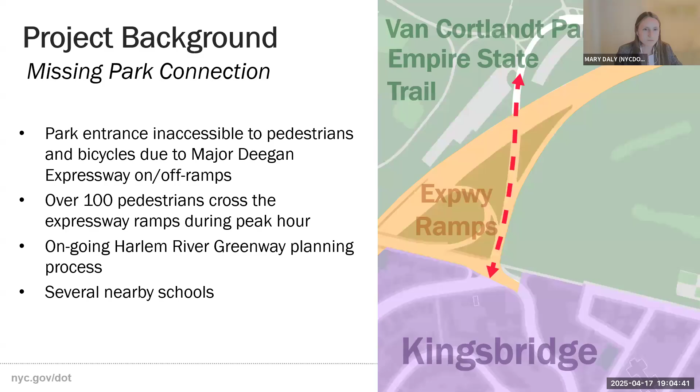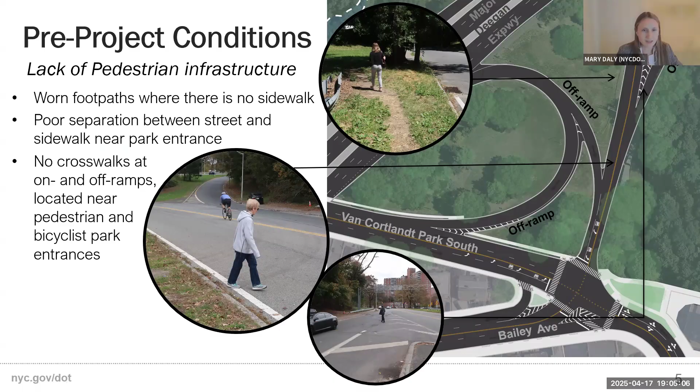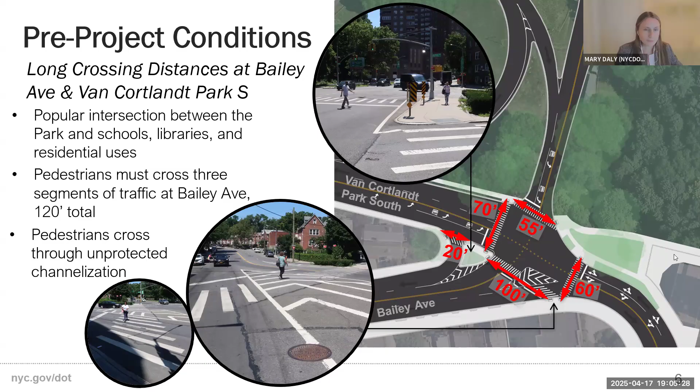There's frequent pedestrians walking across these unprotected intersections to access the park and bike path just north of here. Additionally, just south, there are long crossing distances in the existing crosswalks at the intersections, making it a very difficult intersection overall to navigate as a pedestrian. Furthermore, the bike trails inside the park attract many bicyclists, and with vehicles also heading to and from the expressway, it makes for a pretty dangerous condition for vehicles and bicyclists as they navigate to their respective destinations.

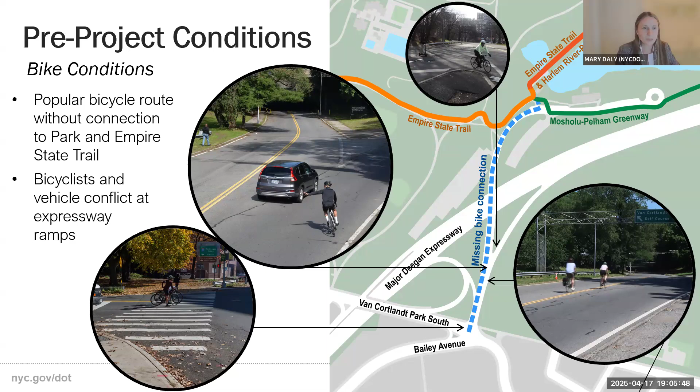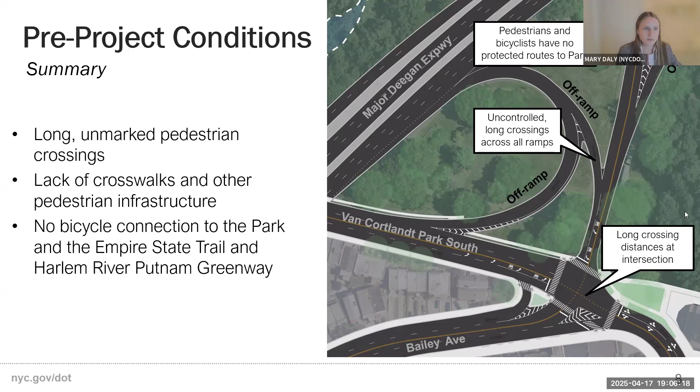So in summary, this intersection and expressway ramps lack basic pedestrian infrastructure such as sidewalks and crosswalks. Bicyclists also lack proper delineation from vehicles as they head to and from the bike paths in the park. But despite these conditions, pedestrians and bicyclists still continue to use this park entrance, so we are obligated to accommodate these users in a safer way.

Since we previously presented, we also wanted to show some additional research our unit has done about the surrounding area, including our comprehensive planning analysis, where we've looked to ensure our project fits into both other projects currently being planned in your neighborhood, as well as being in line with our larger goals as an agency in the Northwest Bronx. Our agency goal is to accommodate the safe, efficient, and environmentally responsible movement of New Yorkers, which this project aligns with.

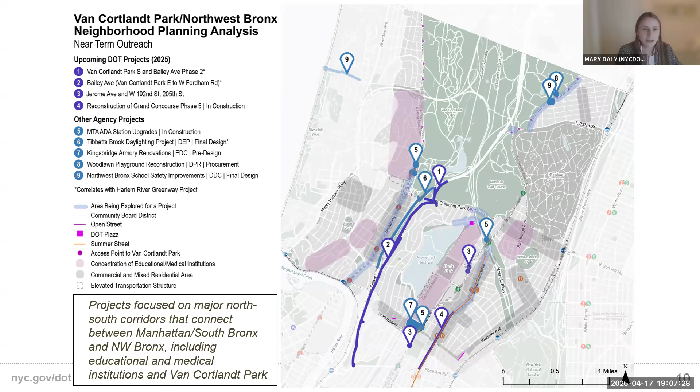We are working especially closely with the other projects related to the Harlem River Greenway. You probably know about the Tibbetts Brook daylighting, number 6 on the map. We are working with their team to ensure our project will be completed before they begin construction next year, as well as the Bailey Avenue Safety Project, number 2 on the map, and we've worked closely with their team to ensure our project connects to theirs. You'll be hearing from them following this presentation, as Anthony said at the beginning.

Also, as part of the Harlem River Greenway efforts I mentioned, we've extracted some of the comments related to this particular intersection, and it's worth noting that many participants mentioned improving this park connection to the neighborhood.

As an update from last year, we completed a small portion of our project to lessen the construction impact in one year and speed up completion. This included parts of the sidewalk leading in and out of the park, shown in pink, as well as a pedestrian refuge island in pink on Bailey Avenue to help with that long crossing distance for pedestrians here.

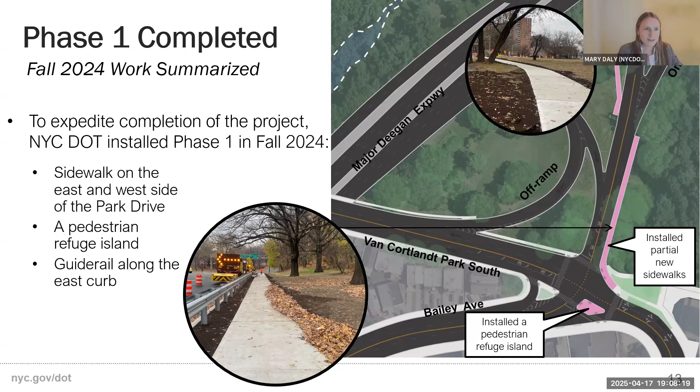We hope to continue these updates this year, and we're happy to report that our conversations with State DOT have been successful, and they approved and agree with our design to realign the expressway ramps as we presented previously. These designs haven't changed at all, but as a reminder, I will go through our reasoning for the proposal on screen here.

The two off-ramps will be realigned to allow us to implement stop controls for pedestrians and allow them to safely cross. At the north ramp in particular, because of this new T-intersection-like geometry, it will allow us to legalize this left turn for vehicles going north on the Major Deegan Expressway, turning left into the park. We've seen tire tracks on the grass where many vehicles are currently making this illegal movement.

In order to lessen the impact from these unexpected movements, we want to allow this safely, and also improve the overall health of the vegetation in the area. On that note, we'll be filling the old ramp areas with compost and grass seed in coordination with Parks and the Van Cortlandt Park Alliance. They're a supporter and partner with us on this project, as it fulfills part of the goals in the Van Cortlandt Park Master Plan.

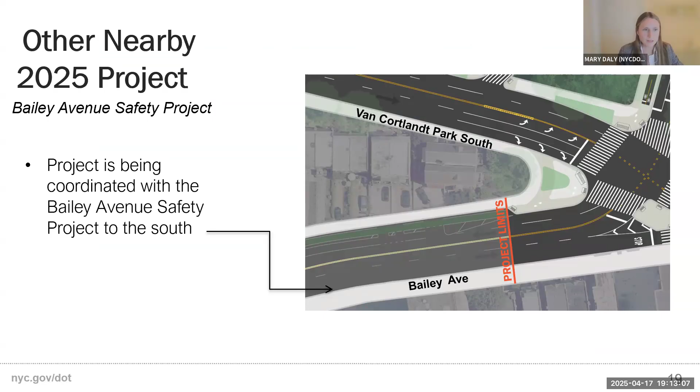And then we just wanted to give you a preview of what's happening next and confirm that we are working very closely with the Bailey Avenue Safety Project to ensure our projects align, so the traffic model and all the plans are fully coordinated and working together to make sure everything's feasible and realistic.

And finally, I'll end on our projected timeline for the project. We hope to begin construction this spring and be substantially complete by late summer, early fall. So, thanks, and I'll take any questions or comments.

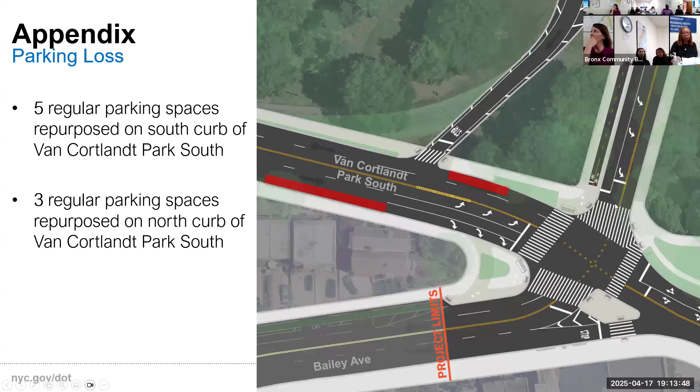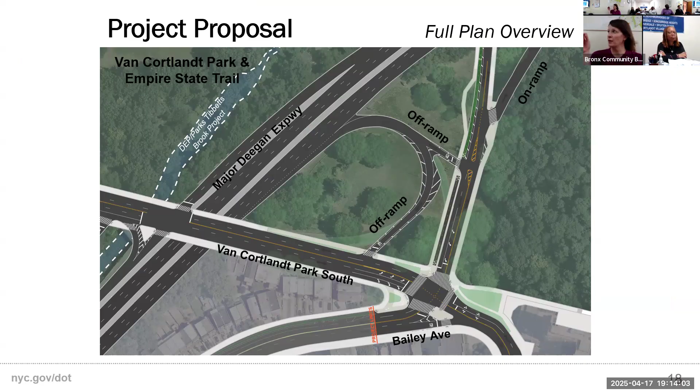I'll just interject and say that here, we won't be allowing the left turn. I was referring to this ramp where people will only be making the left turn if you're going into Van Cortlandt Park South. But for this one, we won't be allowing the left turn. It'll still be right turn only, and we will be implementing rubber speed bumps as well as signage to ensure vehicles aren't allowed to turn left at this off ramp.

Does that make sense? Beyond signage, is there anything else? Because I think in the previous iteration it was quite obvious because of the angle, almost 90 degrees. Unless the signage is very obvious, there's the possibility of somebody saying, I didn't realize, because the break point to recognize is much higher up, and the decision to make a left turn is essentially made as you're coming off the Major Deegan. If anyone makes a mistake, no one's going to loop around, they're going to invariably try to make that risky turn.

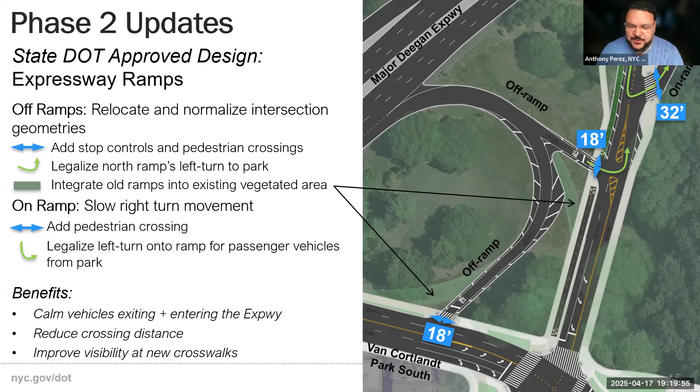That works, screenshots work. My second question, and my bigger concern with this area, is the removal of a slip lane here, because of the amount of traffic that goes into that area, which backs up all the way back to Broadway, between 3 p.m. and 6 p.m., and in the morning as well. With the large development coming, the school and the new development of about 370 apartments, it's just gonna get worse when you remove the slip lane.

Even with what appears to be about 200 feet of a lane - I can't really tell what's there because I don't see any markings. It's 300 feet, and that's at a stoplight as well, right? So the traffic's gonna be backed up?

Well, that was my question and point as well. And is there still street parking there? Last time you conceded that we weren't gonna touch that opening, which we were very happy about. You took our comments into consideration, but now you've changed it again to add it back in, removing that turn that alleviates a lot of the backup that's always occurring over there.

I also wanted to ask, because I see you put green on some of these islands - I'm hoping that means you're still gonna have some greenery on these areas, because I know for the bus stop it's just cement block. And I know as a committee they've always been asking to add more green or more pervious materials to these areas. Will that be taken into consideration as well?

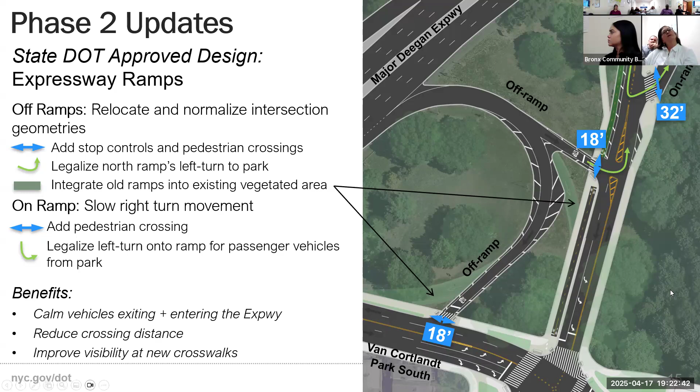Can I just ask one more time, why did we change that right turn slip again? Why did you get rid of it and do it this way?

One of the reasons is there's backup when heading eastbound. Part of the reason is you have parked cars against the curb, and then you have through traffic that's backed up and blocking the right turn. That's why the right turn traffic is backed up. So this way we can have a much longer lane, so the through traffic that's preventing the right turn traffic from getting to where they want to go now has its own dedicated lane.

We're also trying to coordinate with what's coming next, where we have a proposed bike lane on Bailey Avenue, to have bikes navigate through this space and have the bus stop that exists today work with all of that. The best design solution is what you see here, where you have a closed slip lane, so the bicyclists and bus stop users can all have a space together in a coordinated effort, so everybody can navigate the space without running into each other. By closing the slip lane and providing extra space for the right turns, it should all work together.

Our data does include the aforementioned development. We took their traffic analysis and applied it to our traffic analysis, and we found that this still works within our modeling.

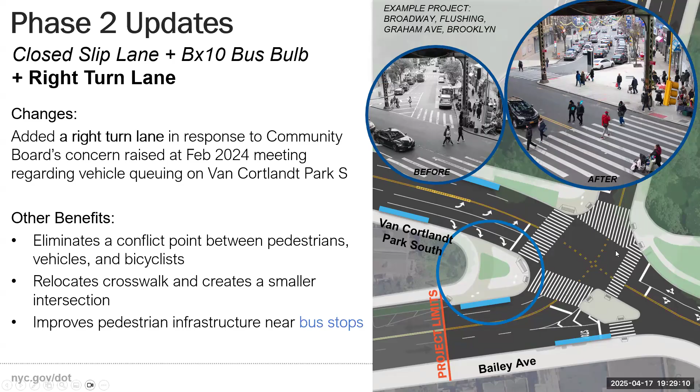All right, my other question is about the entrance 200 yards north, to get onto the Deegan from this access point. I've always seen that as, and I'm guilty of it myself, an acceleration lane to get onto the high-speed Deegan Expressway.

And I like the fact that you have a bulb there, but I think a lot of people will be accelerating through that crosswalk. I'm wondering if maybe you want to make a raised crosswalk there to slow vehicles so that they start their speed on the actual on-ramp.

That's a great suggestion, we'll look into it. Okay. I can't make any promises, we haven't done the analysis yet. No, I understand. But I'm not sure if we're permitted to do that as an entrance to an on-ramp, but if we are, I think it's a good idea.

Okay, thank you. Okay, thank you, David. Let's go to Michelle Cordona.

Hi, just one quick note about that same exposed slip lane that David was talking about. I walk that on a daily basis, and I feel unsafe as it is currently built. More often than not, I have to stop with my dogs because cars never yield, even though there is a little bit of a sign for them to slow down.

So I think the proposal definitely will make things safer for pedestrians crossing to go to the park. As for cars turning, that radius I'm seeing right now—I'm also an architect—looks more than enough, and it does slow them down a bit, but they can still easily turn.

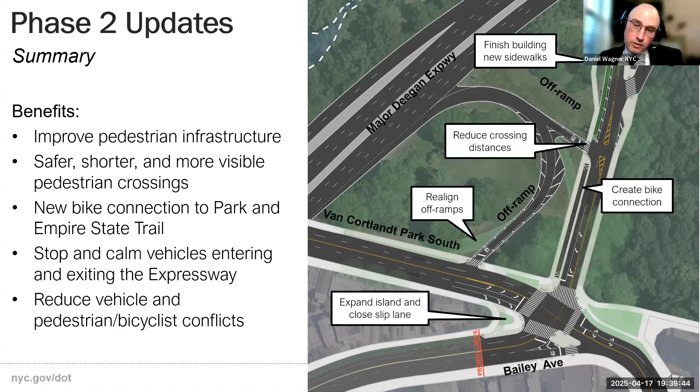I will just say that yes, that's all stuff we can absolutely look into, and adding the appropriate signage. The whole point of this project, well, one of many points of this project, is to create a connection. And as you're pointing out, there's a lot of things to the north here that we're connecting to. So we would be remiss if we did not include the actual information about said connection that we went to lengths to build. So we will look into that. The good news is that once we're done with construction, we can continue to work on that, as signage is a much lighter lift. Sure, thanks.

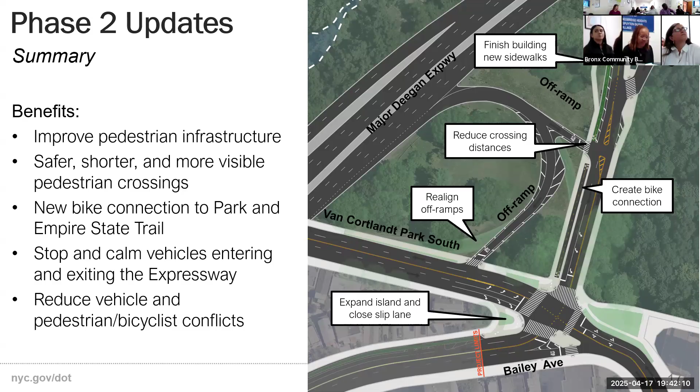Thank you, thanks to Dan and Mary. As I mentioned, this is a 2-game day here. So we have another DOT unit that's here going to kind of seamlessly continue this project past that project line that you just saw on the last slide.

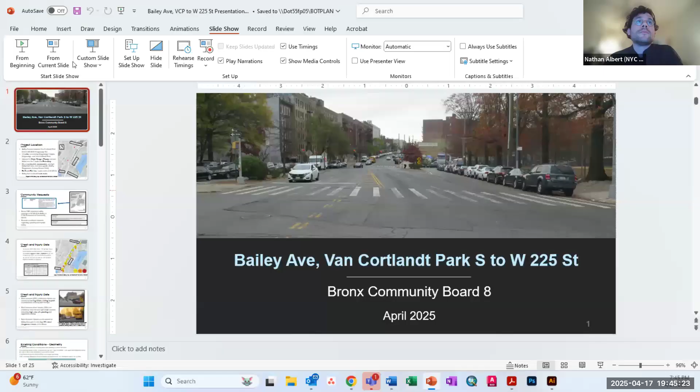Can everyone see this? Yes. Okay, thanks Chris for the introduction. My name is Nathan Albert. I am a project manager on Chris's team at Research Implementation and Safety.

Like Chris said, we're looking at Bailey Avenue. The scope would be from Van Cortlandt Park South, where we've just discussed, south to West 225th Street. So this is 1.1 miles that connects the neighborhoods of Kingsbridge Heights, Kingsbridge, and the park to the north.

It's directly adjacent to the Major Deegan Expressway. In some cases, it's directly on top of it. In some cases, there are buildings or parks in between them in a thin strip. It's also 1 block away from Broadway. Some places it's a quick walk, some places it's a little longer to get over the highway. But Broadway, as we know, has the 1 train and much heavier commercial activity just 1 block away.

Along Bailey Avenue, it's a mix depending on where you are. In some places it's residential with tall apartment buildings or row houses. There are a few patches of commercial activity, particularly around West 238th Street, and some light industrial uses like auto body shops. There are also some parks, particularly between West 233rd and 234th Street — you can see Bailey Playground and Cooney Grauer Field.

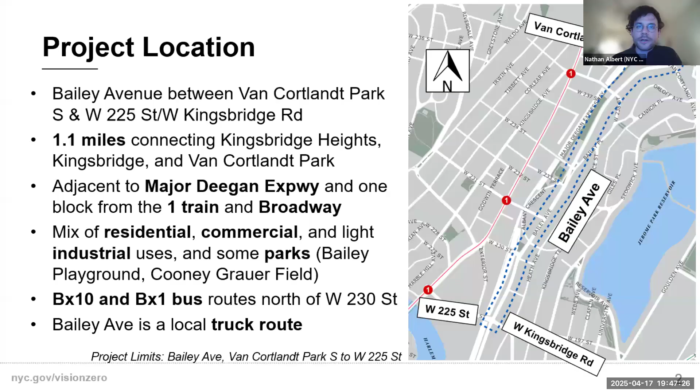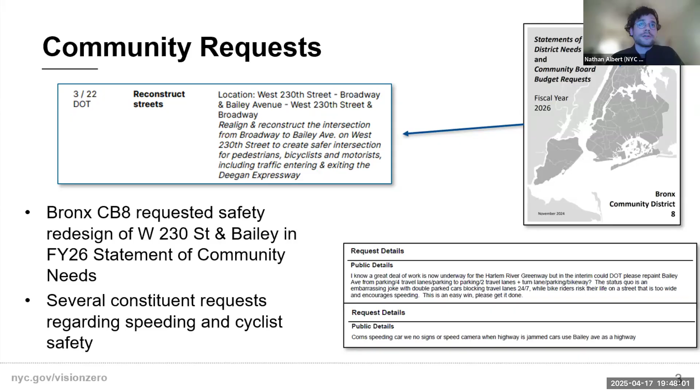In the past 5 years, there have been 179 people injured on this portion of Bailey, but there have been 18 severe injuries and 2 fatalities — one at West 229th Street in 2021 and one at West 225th Street in 2022. Actually, when we first started looking at this project and went before 2020, there were a number of other fatalities, but they've timed out of this 5-year window.

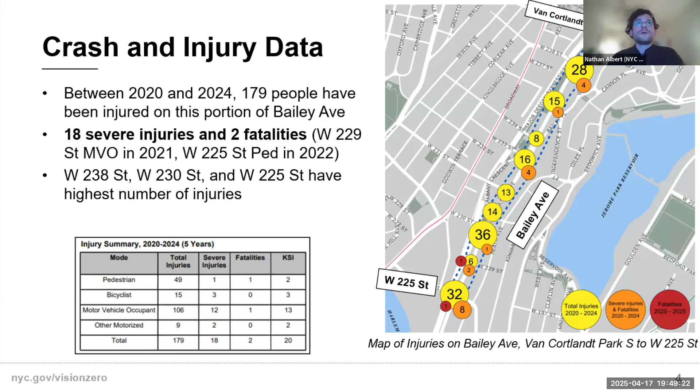And the locations where there are the highest number of injuries are kind of the ones you'd expect — they're the busy intersections: West 225th Street, West 230th Street, West 238th Street. That's where we see some of the worst numbers on the corridor. Diving a little deeper into the data — sorry, there's a firehouse right next to me, so just pause so you don't hear that.

Diving a little deeper into the data, the most common pedestrian injuries were caused by drivers failing to yield to pedestrians. These pedestrians were crossing with the light, in a legally marked crosswalk, doing the right thing, and they were hit by a vehicle that failed to yield. These are types of crashes we see when drivers take turns at high speeds without paying attention, particularly with wide areas and no real visual narrowing of these intersections.

The most common driver injuries, over a third, were caused by rear end and right angle crashes, which indicate high rates of speeding and aggressive driving. And like Chris said, this rate of severe injuries puts it at the top 10% of the most dangerous streets in the Bronx.

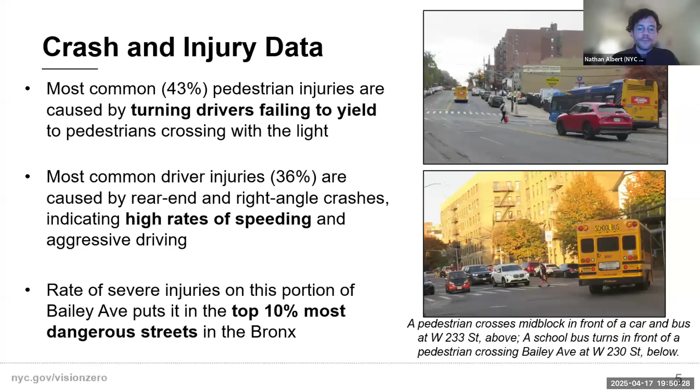Going into the existing geometry of Bailey Avenue, every intersection is different, and we'll go intersection by intersection a little bit later in this presentation. But in general, we see a 60-foot cross section with 2 moving lanes in either direction and parking along the curb.

There are several very long blocks of Bailey Avenue here. We call this an edge condition. Just along the west curb, we have parks, we have the highway, and not as many intersections breaking up Bailey Avenue. So we see long blocks that encourage speeding and a lot of reckless driving along this corridor, both observed in our field visits and in complaints we've received from constituents.

These 60-foot cross sections, which sometimes get wider in some cases, create very long crossing distances for pedestrians. And moreover, there's just no dedicated space for cyclists along this corridor whatsoever.

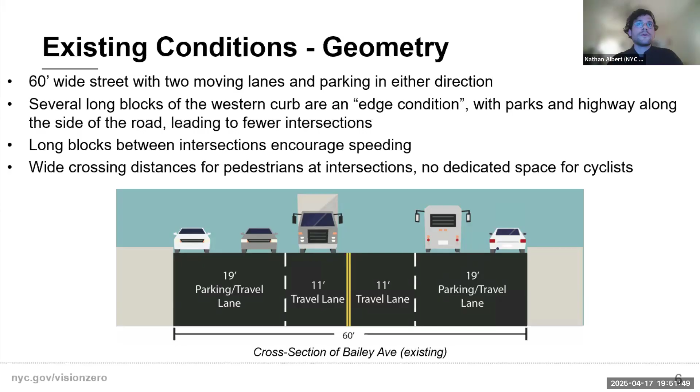Getting a little bit deeper into the existing conditions by mode. For drivers, there's excess capacity. These 2 travel lanes result in speeding, double parking, swerving, and unpredictable behavior. The speeding, particularly on these long blocks, leads to high rates of rear end and right angle crashes and injuries, particularly in the mid blocks. The data we get from the NYPD will sometimes classify crashes in the mid blocks - they're not happening at the intersection, they're just happening on straightaways. We see a high number of these speeding-related crashes just in the mid blocks because of speeding and reckless driving.

Moreover, at every intersection, there are no turn bays. There's 2 lanes of traffic, but they're not really marked. So if you're a vehicle looking to go straight, but you're in the left lane, and someone in front of you is trying to make a left turn and waiting for an opening, that vehicle waiting for the left turn gets pressure to make the turn faster, maybe do something reckless or sudden, creating more opportunities for conflict and crashes. And if you're in the vehicle that wants to continue through the intersection, you might swerve around that vehicle, which creates further opportunities for crashes. So there's no turn bays at any of these intersections, and we see that creates real problems for both left turning vehicles and through moving vehicles.

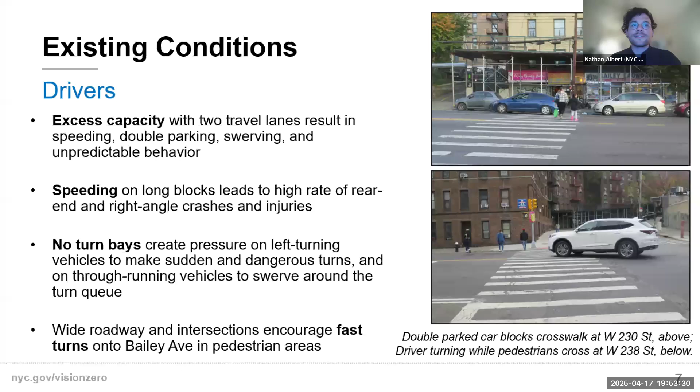Wide roadways and intersections encourage fast turns onto Bailey Avenue, particularly in pedestrian areas.

For pedestrians, there are long crossing distances everywhere, particularly in the areas one block away from the 1 train on Broadway - that's West 238th Street, West 231st Street, and West 225th Street. We see very high numbers of pedestrians going to and from the train, and then they come to Bailey and cross 60-foot, sometimes longer distances without any protection from vehicles that are driving quite fast.

In a number of these locations, the intersections are misaligned as well - they're not really happening at right angles. So cars are making turns that are sort of highway-like, shallow turns instead of being able to make the full slow 90-degree turn that has better safety benefits. And as I said earlier, vehicles fail to yield to pedestrians all across this corridor and cause almost half of the injuries to pedestrians on the corridor.

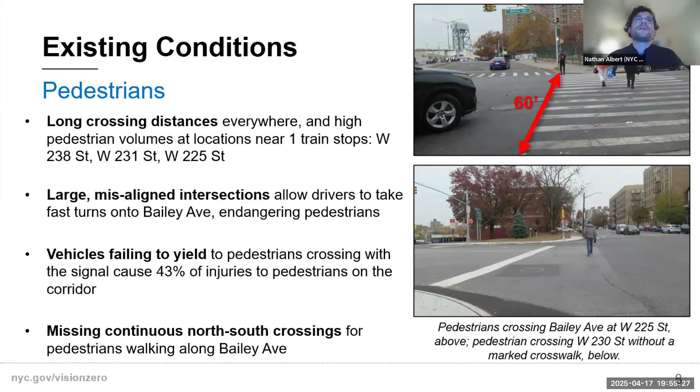Finally, for cyclists, despite there being no dedicated space for bicycles on Bailey Avenue, we see almost 150 cyclists use this stretch per day. We can infer that they're taking this to Van Cortlandt Park, but also to Broadway Bridge to get into Manhattan, and other destinations in the neighborhood, the commercial areas one block to the west along Broadway. But the lack of dedicated space along Bailey Avenue leads to cyclists sharing travel lanes with fast-moving buses, trucks, and personal vehicles. And because of the double parking all along the corridor, we see cyclists swerving into the left lane of traffic sometimes to get around them. This is just an unacceptable and unsafe situation.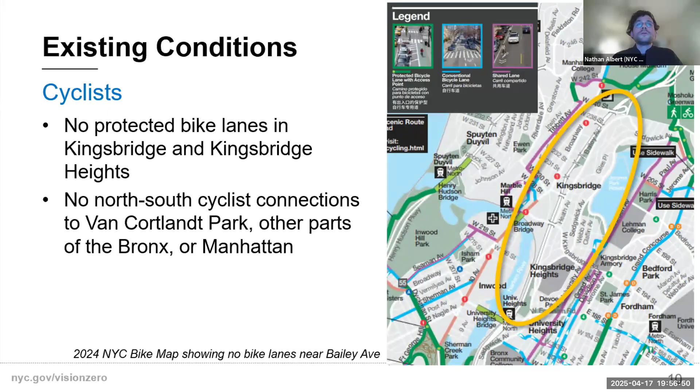So here's our proposal. On the top right, you can see the existing cross-section at 60 feet. We're proposing removing a travel lane in either direction, which will narrow the area of the street through which vehicles can drive, and calm traffic. In that space, we're going to be creating a wide painted flush median that's generally about 9 feet wide in the center of the street. And on the west curb, we're going to be adding a parking protected two-way bike path along the west curb of Bailey Avenue.

I want to note that in the approach to every intersection, we're going to be including a turn bay. So this will maintain the current capacity of two lanes approaching every intersection, but it'll organize the traffic into a left turn and a straight turn bay, or a straight and a right turn bay. And that's demonstrated on the bottom right of this slide.

We're also, at all feasible locations along the corridor, going to be implementing pedestrian islands to shorten crossing distances. And these islands also will encourage slower and safer turns for vehicles to reduce those types of failure to yield conditions that we have been discussing all throughout this presentation.

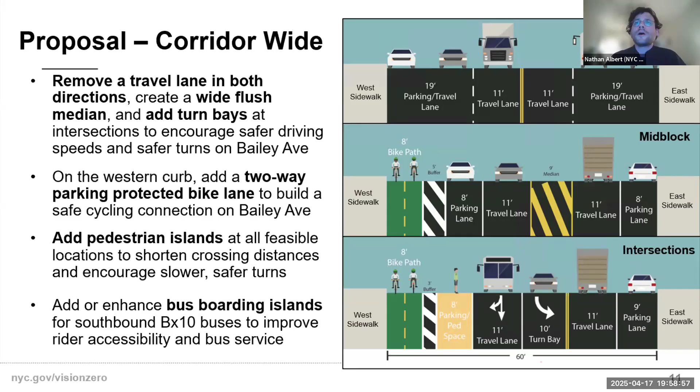So one more note about this design. Chris earlier mentioned this idea of KSI, killed and severely injured. This is something that at DOT, when we're looking at data and where to allocate our resources, we're really looking at this KSI number. And the design that I shared is something that DOT has been doing for 10, 15 years now, so we have a really good base of data that we can look at to see the types of safety benefits these types of projects are associated with.

What we see is these protected bike lanes improve safety outcomes for all road users, drivers, pedestrians, and cyclists alike. But the most significant safety improvements are associated with senior pedestrians. We've seen 39% reductions in KSI crashes, killed and severely injured crashes, for senior pedestrians when we implement these types of protected bike lanes. So I just wanted to call out the real broad safety benefits of this project as we continue through the presentation.

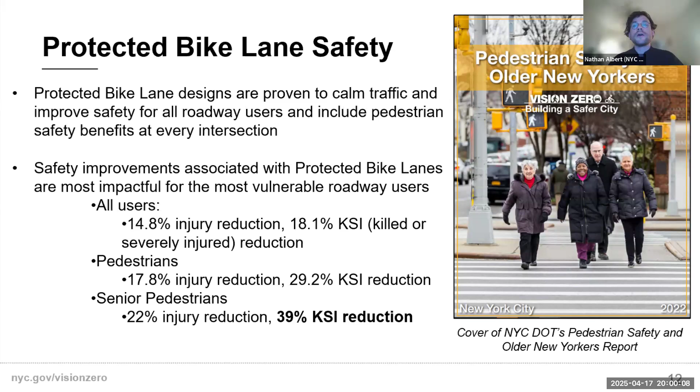I'm going to go through each intersection starting from the north and finishing at West 225th Street, and then close out the presentation, and then we can take questions. I'll just mention this presentation will eventually be posted on our website.

We have talked about this one location at length because of Mary and Dan's prior presentation, so I'm not going to get into too much detail here. None of this is new, but this is meant to focus on what's happening south of Van Cortlandt Park South. One thing I just want to note that actually isn't called out in any of these boxes here, but it's something I was thinking about as we were discussing the proposal, is traffic flow at this location.

It's a concern that was raised by the community last year, and it's a concern that we've been considering as we iron out this design. Just want to note that because of the geometry at this intersection, we're maintaining on Bailey Avenue, south of the intersection, 2 lanes in either direction. So this is designed to keep traffic flowing.

For the right turning vehicles coming north on Bailey Avenue to turn right onto what eventually is called Van Cortlandt Avenue West, because east of this intersection is called Van Cortlandt Avenue West, we're going to be converting that right turn to a stop sign from the current signal, so it'll help process the vehicles out of this intersection a bit more efficiently.

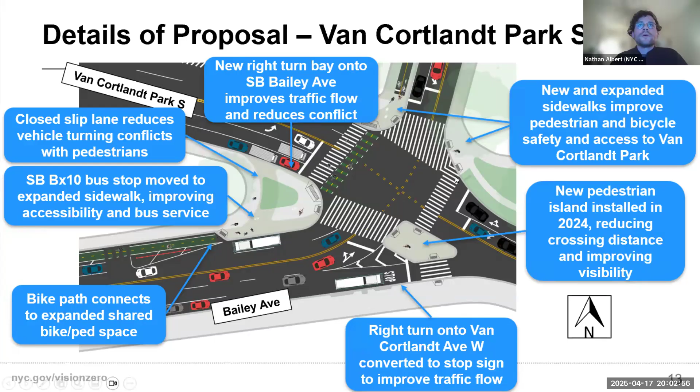So this is West 238th Street, and the big intervention that we're proposing here is the bus boarding island on the northwest corner. That will improve the Bx10 southbound accessibility and bus service, and it'll also remove conflict between buses and bus riders and the cyclists that are using the west curb bike lane.

This island will also have a calming impact for vehicles that are making the right turn onto westbound 238th Street. It'll also reduce the crossing distance for pedestrians that are crossing in this north leg of the intersection of Bailey, that they're crossing Bailey Avenue, and generally just reducing the exposure that pedestrians have to vehicles.

I also want to call out the turn bays at this intersection. Southbound, there will be a new left turn bay that organizes the left turns to 238th Street, gets them out of the way of through traffic, and allows them to make a more patient and safe turn.

And then for northbound Bailey Avenue, we're proposing both a left turn bay and a new protected left turn signal that allows the left turning vehicles to make this turn onto West 238th Street without any conflict with any oncoming vehicles, pedestrians, or cyclists. This will have a great impact on safety for all users, but it'll also make for a much more predictable and organized experience for drivers at this intersection. And as I said earlier, this is one of the busiest intersections, both in terms of crashes and pedestrian numbers, on the entire corridor.

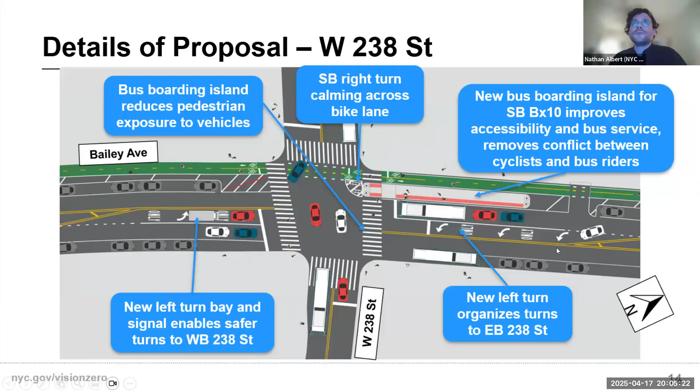I mentioned earlier that there are these sort of gaps in what would be a consistent crossing area for pedestrians that want to walk north or south along Bailey Avenue. There are two concrete islands at the intersection of West 234th Street, Bailey Avenue, and Bailey Place. There's currently no legal movement for vehicles to move through the slip lane at all, because if a vehicle wants to move north on Bailey Place, they're going to make the right turn one block south on West 233rd Street to merge onto Bailey Place, or to exit Bailey Avenue in a sense. They're not going to be doing it — it's currently not legal at 234th Street anyway.

So we're going to be closing this slip lane in concrete so that pedestrians can continue north or south on Bailey Avenue without having to deal with any conflict or even any traffic signals. It's just going to be a new sidewalk.

On the west side of the intersection, we're proposing 2 new pedestrian islands: a smaller one on the northwest corner and a much larger one on the southwest corner. These islands will calm turns, reduce conflicts with vehicles for pedestrians, and also protect the cyclists that are using the new 2-way bike path on the west curb.

This southwestern concrete island, which is larger, is also designed to slow the turns for southbound vehicles heading onto this slip lane across from the park, continuing south onto Albany Crescent. Currently it's just a wide open space with a lot of double parking, and when there's no double parking, a lot of speeding. This larger island will force cars to make a much slower and deliberate turn here, yielding to cyclists and pedestrians moving across it.

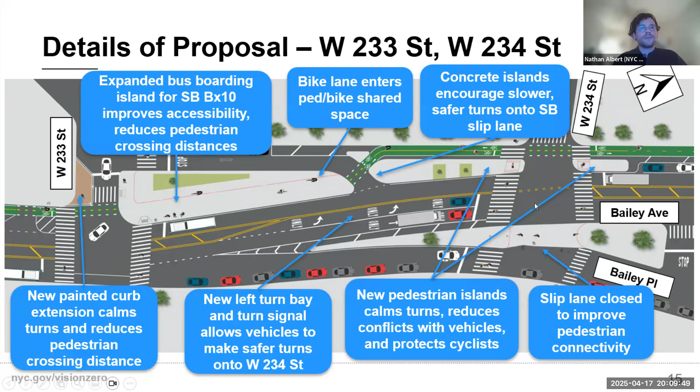Lastly, for northbound vehicles approaching West 234th Street, we are proposing a new left turn bay and a new protected turn signal, so that vehicles making the left onto West 234th Street do so without any conflicts with oncoming vehicles, pedestrians, or cyclists.

One intersection to the south is West 231st Street. Here we're proposing a new painted pedestrian island on the northwest corner of this intersection. This island will calm vehicle turns, reduce pedestrian crossing distance, and protect cyclists using this west curb. For northbound vehicles at this location trying to make a left onto West 231st Street, we're proposing a new northbound left turn bay and a new left turn protected signal that will reduce conflicts with oncoming vehicles, pedestrians, and cyclists.

I also want to mention a design here which is replicated throughout the proposal: all driveways currently on the west curb will still have their access maintained with treatments that look similar to this, allowing them to get out and make the turn safely with visibility.

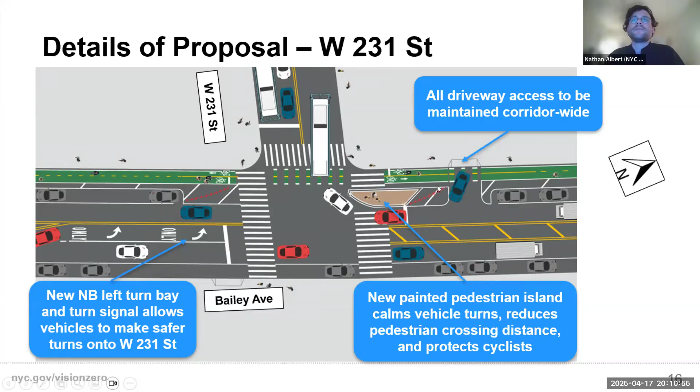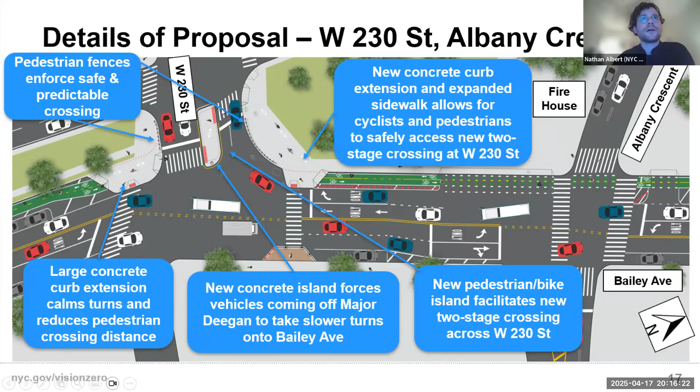On the north curb, we're proposing another concrete curb extension that would allow cyclists using the west curb bike path to get up onto the sidewalk, which will briefly become a shared space. Because it's shared for both cyclists and pedestrians, we're expanding it substantially into the grassy area currently managed by the Parks Department, so there's adequate passing distance for this short stretch to get them into the crossing at West 230th Street.

A few other things about these two intersections: we're proposing a number of turn bays. This northbound left turn, which is heavily used, will get a left turn bay — there's currently none here, believe it or not. We're also adding a northbound left turn bay and turn signal at Albany Crescent, and a southbound left turn bay for Bailey Avenue going east onto Albany Crescent.

We're proposing a small painted curb extension here, which combined with the concrete curb extension on the west side will substantially reduce the crossing distance for pedestrians going across this north side of Bailey Avenue and West 230th Street by about a third.

For southbound vehicles on Bailey Avenue approaching West 230th Street, we're proposing banning this left turn. It's a very lightly used left turn into this one block of West 230th Street, but vehicles will be able to make this turn more safely one block north on Albany Crescent if they're interested in accessing Heath Avenue. So there shouldn't be real adverse impacts on traffic or access to the neighborhood.

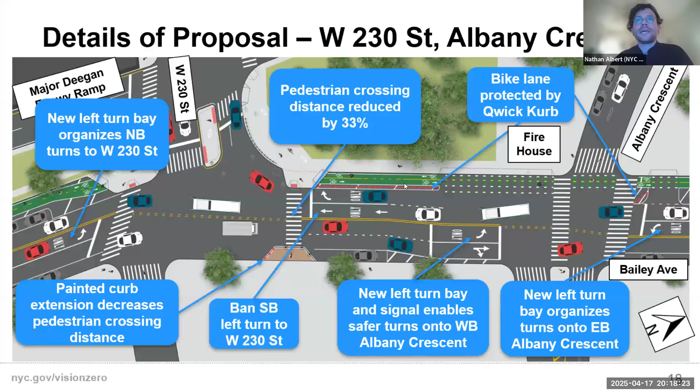One very long block south, we have West 225th Street, which is the southern edge of the proposed scope of this project. We're proposing 2 new turn bays here, a right turn bay and a left turn bay for southbound vehicles, again to promote safe and organized traffic flow. We've done traffic analysis to ensure the road maintains safe traffic flows, even though we're reducing the lanes in the mid blocks along the corridor.

We're also proposing, along the bridge of West 225th over the highway, 2 very large painted curb extensions and a painted median tip to dramatically reduce pedestrian crossing distance and to calm the turns into...

Yeah, you're back. Okay, it was a glitch for a minute. I think Nathan may have frozen.

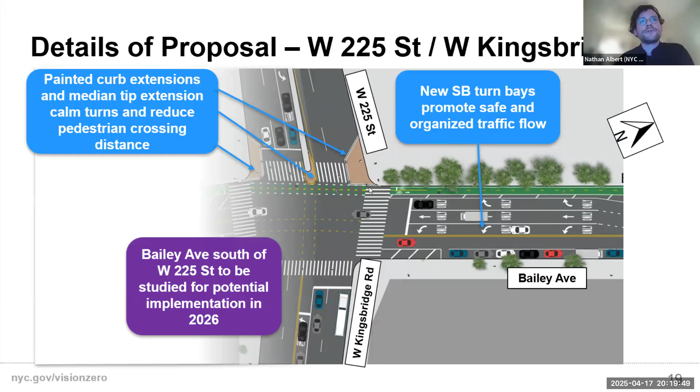But I will mention that potentially implementing this proposal to the south of West 225th Street, although I believe that's outside of your community board, would be for future implementation in future years.

We evaluated the parking impacts of this proposal all along the 1.1 mile corridor and have determined that approximately 46 spots over the extent of the corridor will be repurposed.

I want to call out some of the causes of this. First, turn calming treatments that improve visibility and encourage slower turns, addressing the left turn and right angle crashes plaguing this corridor. You can see an example on the top right on Crescent Street in Queens, where an area that would have been used for car parking has Qwick Kurb, which I mentioned earlier, to do what we call daylighting the intersection and calming those turns onto the next street.

We also are adding new pedestrian islands and new curb extensions at every intersection, which create shorter and safer crossing distances for pedestrians. They look something like the image on the bottom right, Columbus Avenue and West 70th Street, but again in areas that would otherwise have car parking. In order to create this pedestrian safety intervention, we need to remove a couple of spots at the intersection.

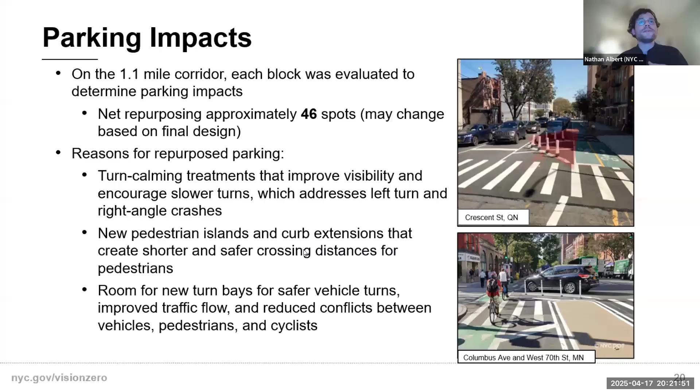One final note about connectivity throughout the neighborhood. Earlier I showed a bike map slide that had no bike lanes in the neighborhood. You can see in green the proposed Bailey Avenue project we just presented. To the north, the orange arrow is the presentation given earlier that will connect Van Cortlandt Park South to the Greenway network within Van Cortlandt Park.

I also want to mention there is an ongoing project in collaboration with the Parks Department and DEP to build out a greenway on the west side of the Major Deegan. This is a very long-term project; the estimated completion date is currently 2030, but I wanted to call that out as something in the pipeline. I also mentioned we're considering future corridor connections south of West 225th, and DOT is also exploring a connection to the Broadway Bridge along West 225th to the west of Bailey Avenue. But these are our future proposals or ideas that we're still studying.

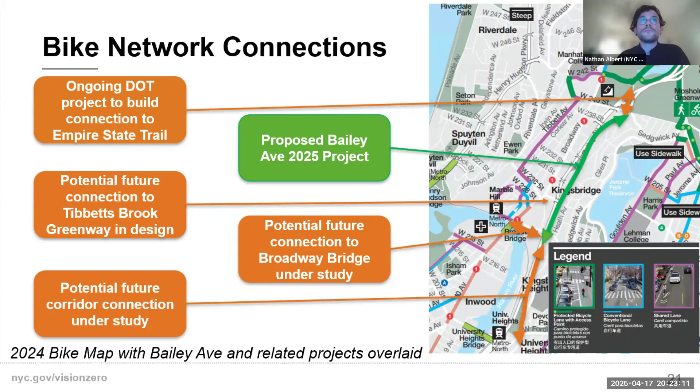One last thing to call out is the Harlem River Greenway. You may be aware that over the past few years, DOT has held over 30 public workshops and community events to collect feedback on a proposed Harlem River Greenway, which would connect Van Cortlandt Park to Randall's Island with a continuous and connected path. The map on the right in purple shows the opportunities for this greenway on DOT right of way on our streets, parts of the corridor that we can implement with in-house materials.

We can do it quickly. Bailey Avenue is the northernmost phase of this that's on-street, on DOT property, of the Harlem River Greenway. In orange, you can see some of these longer term capital projects. Some of them are still conceptual, but these would be done over a much longer term. The purple ones are done on-street with DOT resources, and Bailey Avenue will be the northernmost leg of this route.

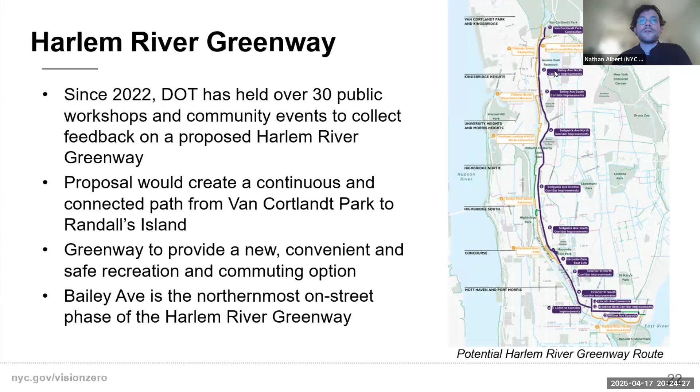Alongside this, the Harlem River Greenway process involved a lot of community outreach and discussion about Bailey Avenue. I just want to highlight what we heard. In addition to Bailey Avenue's opportunity as part of the Greenway for commuters and for recreation, to connect people to Van Cortlandt Park, participants in these workshops were also...

I think it's just Nathan who's glitching. Yeah, okay. Just so you know Nathan, we can't hear you right now.

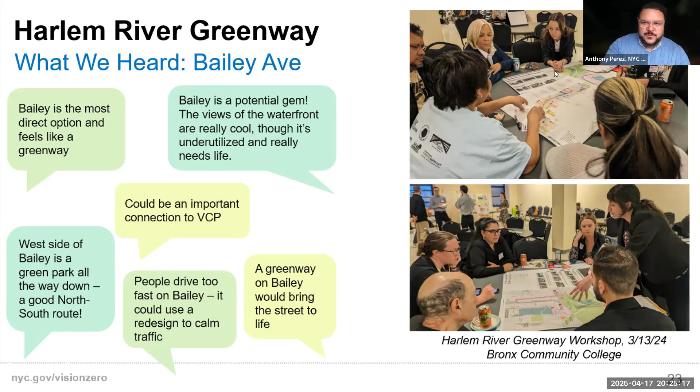Chris: The lane reduction on Bailey Avenue organizes the roadway. It calms traffic, and the new turn bays and turn signals everywhere possible will promote predictable and safer vehicle behavior. We're proposing substantial pedestrian safety improvements at every intersection, which will reduce conflict points with drivers, increase visibility, and shorten crossing distances where possible.

We are proposing a protected bike lane in both directions that adds up to 2.2 new miles of protected bike lane mileage through Kingsbridge and Kingsbridge Heights, which will provide safe connections to the park and other neighborhood destinations. And for the BX10, we are proposing bus service and rider accessibility improvements.

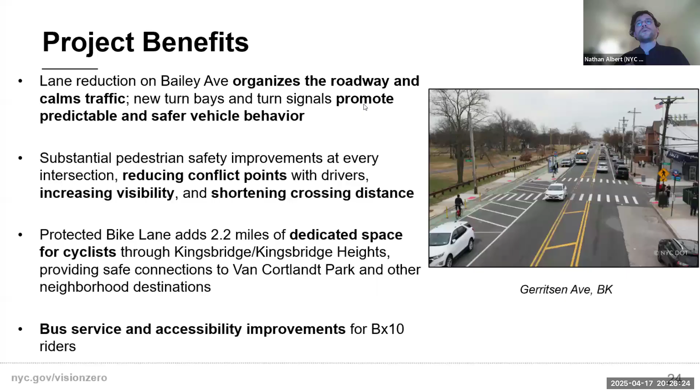You can see to the right is Gerritsen Avenue in South Brooklyn, a similar design to what we're proposing here, so you can see it in action. But that's it for me. Thank you so much, I'm happy to take any questions along with my colleagues Chris Brunson and Ben Schwade, as well as the Bronx Borough Commissioner.

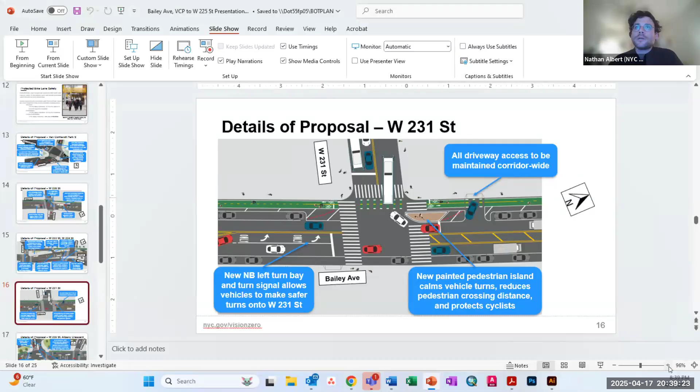Here's the example I showed earlier, but it also shows parked cars. We have this floating parking lane where these gray cars are parked. By and large on the east curb, there's no real changes to parking, but along the west curb, where we have this bike lane and the pedestrian islands, we'll have this floating parking, which will protect the bike lane but also continue to allow parking for the vast majority of Bailey Avenue along the west curb. It's just at the intersections where we have some of these treatments in the parking lane. We're working out the driveway plan for the whole corridor, but they'll generally look like this to maintain access on the west curb.

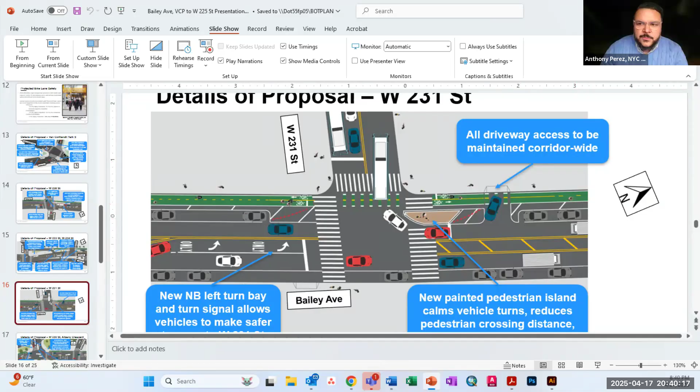If I could take the opportunity to quickly talk about the comment on parking repurposing, I think it's important to step back and look at the big picture. We're talking about over a mile of project, a very long stretch, and that's 46 spots. If you look at it in terms of blocks, these are very long blocks, but it's basically like 10 or 11 standard city grid blocks. Do the math, 46 divided by 10 or 11, it's about 4 spots per block, and really it's just the corners, protecting to create the turn bays and make the turn safer. If we brought a presentation for just 3 blocks, that number may be smaller, but it's a bigger number of spots for a way bigger number of blocks. But it still impacts the community. Agreed, understood, I just want to contextualize that.